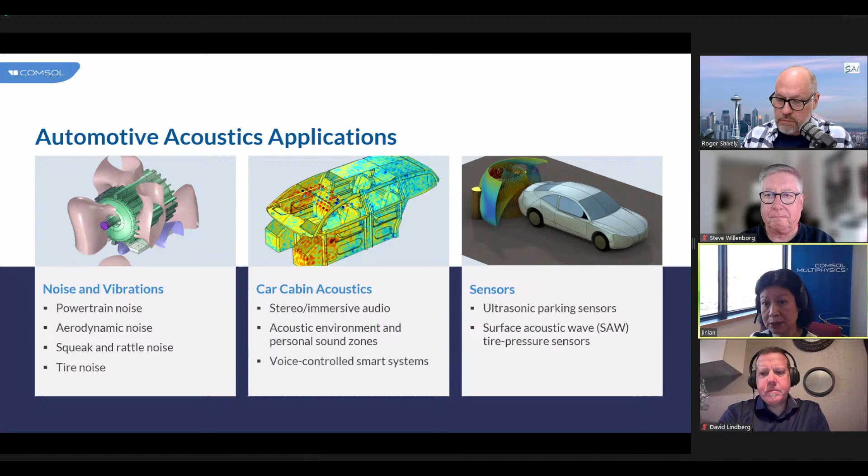So there are all different kinds of applications, and most of them involve multiphysics. Many require acoustic-structure interaction for vibroacoustics, such as the study of structure-borne noise or vibration-induced noise. In some cases, you also need to include electromagnetics, for example, when you want to study noise from an electric motor. Porous materials are widely used in the industry for noise control, particularly in mufflers and particulate filters. Electroacoustics is required for loudspeaker design, and also car cabin acoustics if we want to include the real speaker sources. And piezoelectricity is responsible for the operation of ultrasonic sensors.

And when you talk about porous materials, there's also poroacoustics, where we're talking about these very small spaces in acoustic solutions, which come into play when we're dealing with meshes that go over loudspeakers, or putting a microphone in a position where it may have some boundary. Yeah. Poroacoustics is a very efficient way to model acoustics in porous materials. And I want to say COMSOL provides solutions for all these multiphysics phenomena and offers a range of numerical methods that can be used alone or combined to meet your specific needs.

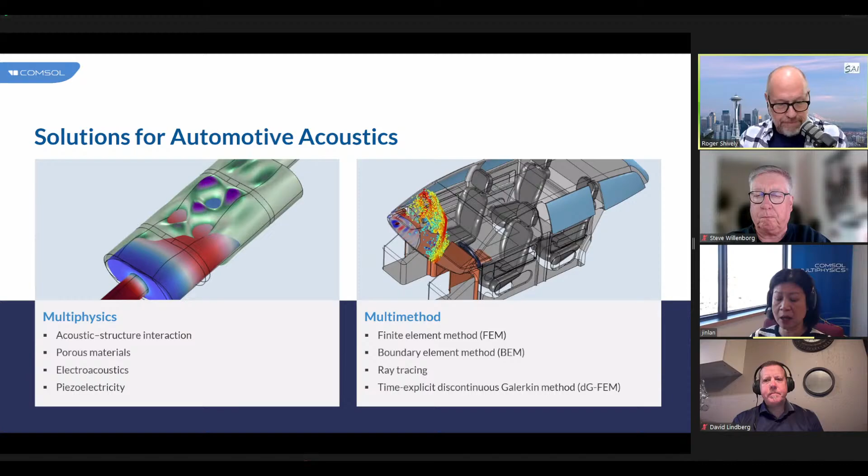Let's take a closer look at the multiphysics and multi-method approach. Quickly, before you get into that, you have those four possible methods. Are they all a single module, or are they separate modules that you put into your base modules for multiphysics? Yeah, so these methods are seamlessly implemented into the Acoustics Module. You do not need an additional product in order to use a specific method. They are all included in the Acoustics Module. Oh, good to know. Thanks. So I want to show you all these wonderful multiphysics and multi-method approaches in COMSOL with a simple vibroacoustic setup.

So as seen from the screenshot, you have a vibroacoustic problem that requires physics interfaces for modeling structural vibrations, here by solid mechanics and shell interfaces. And also you need physics interfaces for modeling acoustics in fluids, here pressure acoustics based on the finite element method and boundary element method.

So Roger, to answer your question, the methods are implemented into a physics interface. So you don't even realize, oh, it's a different method. It's basically you are using a different interface. Okay, good. Yeah, and COMSOL includes built-in features to couple them all, which is defined under the multiphysics nodes. I think that's the power of the COMSOL multiphysics approach. Yeah, there's simply an interaction, not a new process that you have to start over. That's good. Yeah, very good.

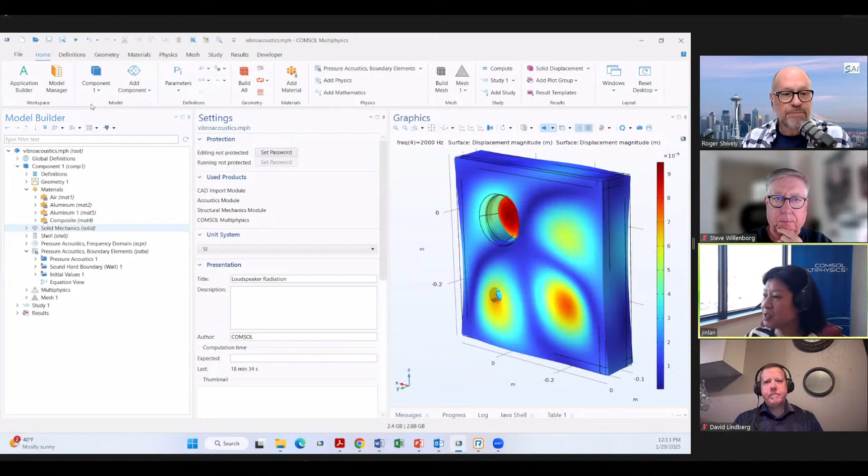Let's open COMSOL and look at the physics interfaces and their couplings, so you have a better view of how it looks. There we go. Yes. So here we basically have a panel with an air cavity inside and a speaker mounted to the panel. So you can imagine this is a very simplified car door model, right? The door is comprised of aluminum solid domains. These domains are modeled with solid mechanics, simply as a linear elastic material in this example.

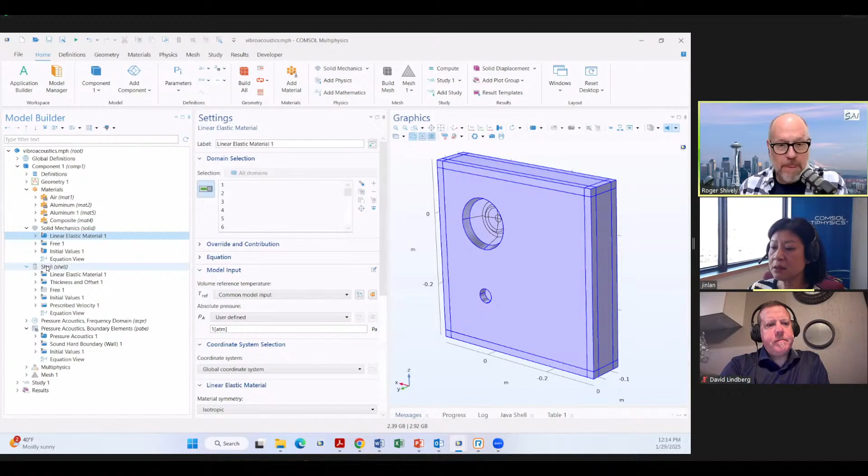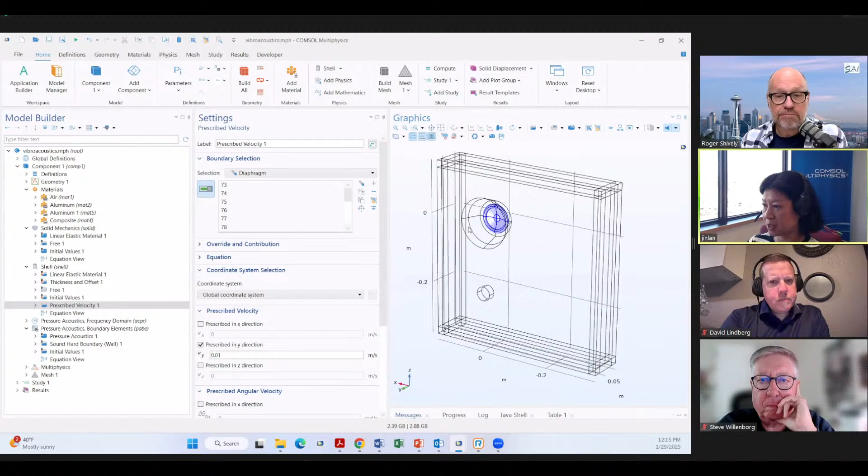And then the speaker is modeled by using shell elements. These are basically very simplified surface elements in a 3D model to model very, very thin structures. Here you are able to specify the thickness of the thin structure, so you can have different thicknesses in different components. Here we simply use one thickness. And in the shell model, we simply apply a prescribed velocity in the y direction. This is the acoustic axis direction to excite the speaker.

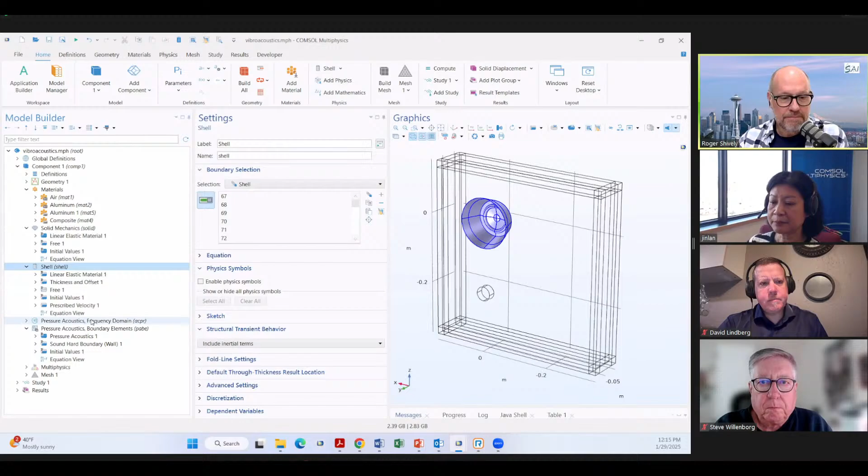Yeah, so you can scale a large model into something that's a little bit more manageable, especially for very, very thin panels. Then you can usually save computational resources, and just model using surface elements, so you do not have to mesh the thickness. You got it. Yeah.

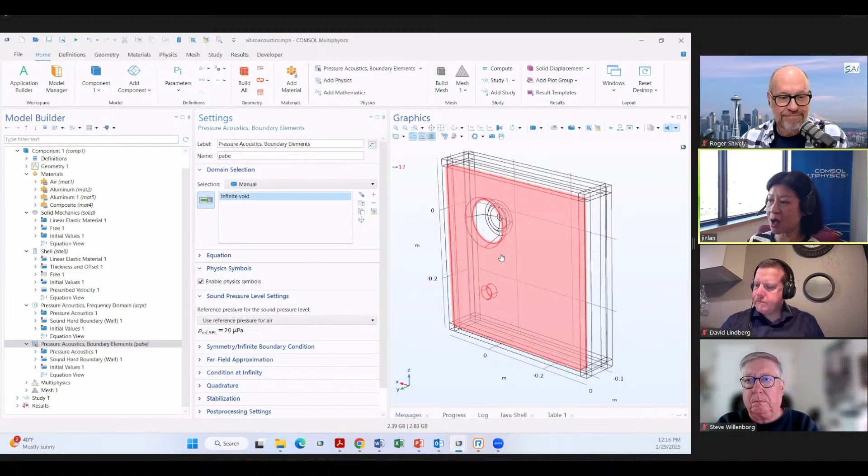And then we have acoustics. We use pressure acoustics, frequency domain. This is pressure acoustics implemented using the finite element method, applied to the air domain inside the cavity. And then we have boundary element pressure acoustics applied to the exterior domain, which is identified as infinite void here. That means anything that is not drawn in the geometry. The exterior domain is modeled using the boundary element method.

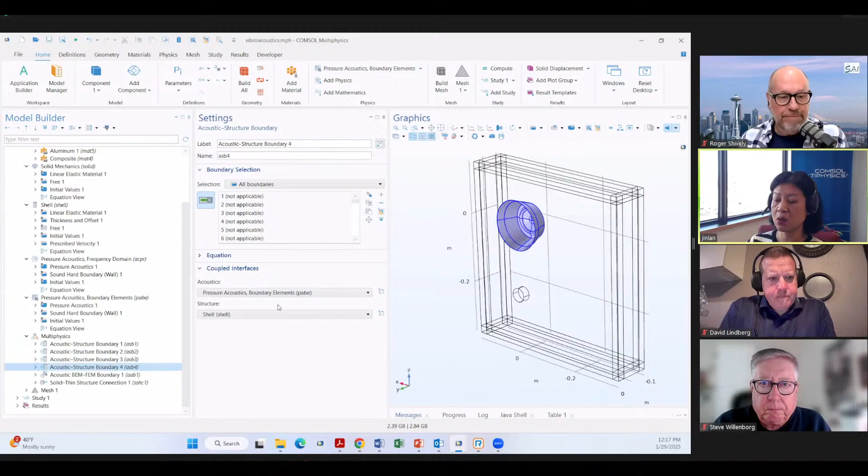Now, all four physics are coupled under multiphysics. We have the acoustic-structure coupling that couples pressure acoustics inside the cavity with solid mechanics. Then the acoustics inside the cavity coupled with the shell vibration. Then the acoustics outside, modeled by the boundary element method, coupled with solid mechanics, and also coupled with the shell. So acoustics are coupled to all the vibrations, and the acoustics inside are coupled to the acoustics outside at this port opening boundary. So acoustics are continuous. Right.

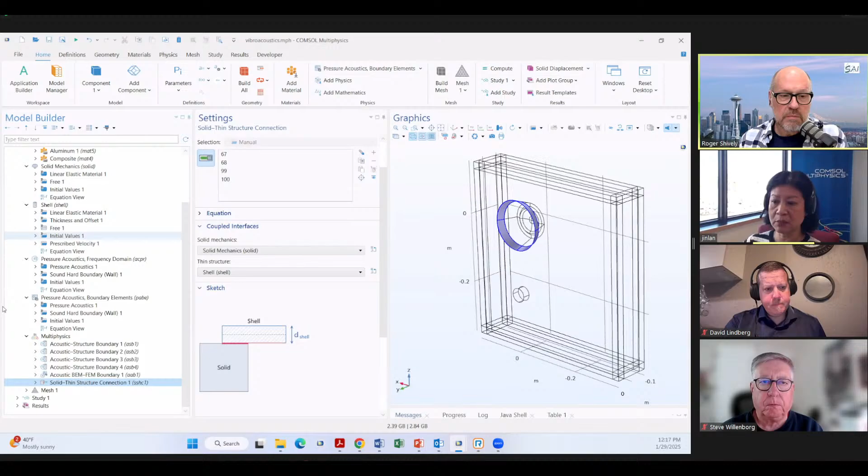And then lastly, the solid and shell physics are coupled at the edge where they overlap. This guarantees the displacement fields are coupled and continuous. So everything is coupled under this, in a very structured, organized way. If you right click, you can see these couplings are built in. You can just add them based on how you want the coupling to be done.

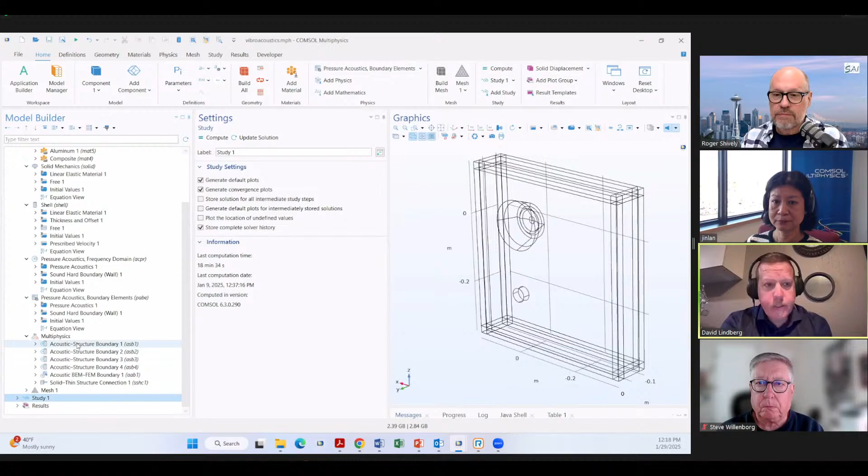Yeah. So you could dig further with this and start adding the adhesives, how you're assembling this, what goes in between those different shell and pressure acoustics components. You just keep adding to it and building what you're planning to build in real life. Yeah. So your geometry can be much more complicated. As Dave mentioned, you can have an adhesive layer. It can go as complicated as it can be.

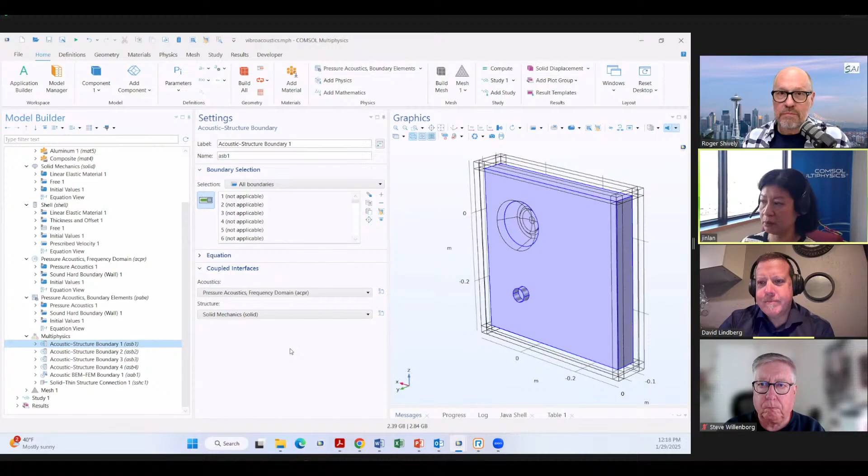And you might have porous material in this structure as well. Then you can add a poroelastic waves interface if you want a very detailed, precise model for the porous material. Then you can couple everything together. It's all done underneath here. Yeah, and these are all built in.

Yeah, I think that's exactly where you end up going, Dave, for sure. We start kind of simple, so we make sure that the general physics makes sense in a grand sense. And then as we see how that's doing, maybe we start to focus on particular areas. You may not need adhesive everywhere, but just where you might find it important.

And that makes you a more refined model, but it's something you can work yourself to—step one, do something very conceptual, and step two, do something more refined so we can get the detailed information needed to make it more of a real product. It's not just an analytical design.

It gives you those design freedoms, so you can look at whatever aspect is important to you. And the beautiful part is the coupling that goes on here—we'll get into that later when we get to the time domain. But yeah, that's even better. Go right ahead. Thanks, Jinlan.

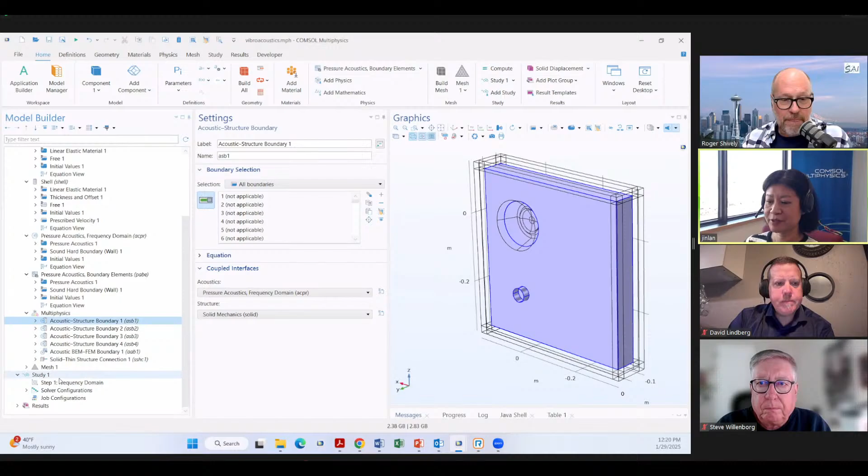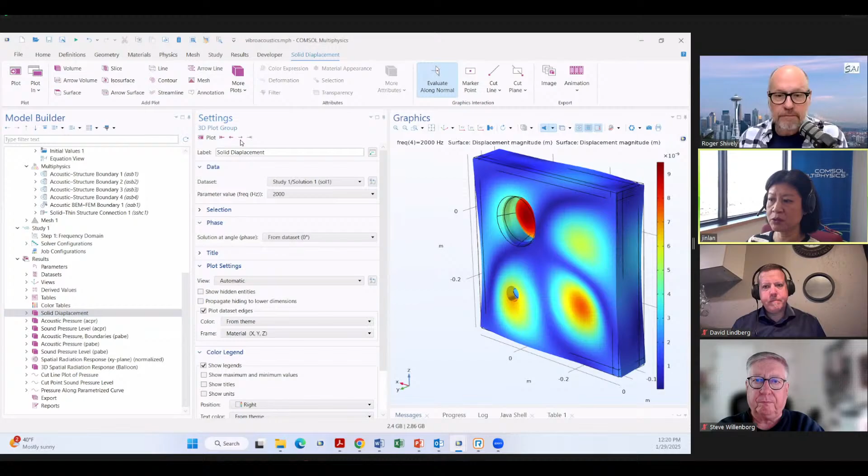Sure, thank you. So now we run—of course you create a mesh first, and then we run the study. Here I just run several frequencies. Then you get these nice default plots showing the displacement for different frequencies. You're able to see higher and higher modes start showing up as frequency increases.

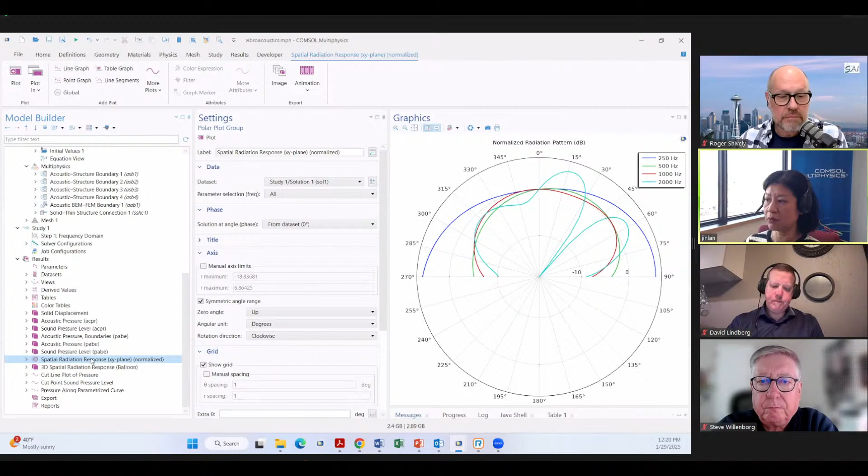Then you're able to see the pressure inside the cavity, sound pressure level, then pressure outside—this is done by evaluating the BEM solution and sound pressure level as well. COMSOL also creates default plots showing the radiation pattern, so here is a 2D polar plot showing the radiation pattern for different frequencies, and you can also get a nice 3D balloon data plot.

So yeah, I always want to start with simple to give you an idea, then we're going to dive into more complex models. So let me go back to my presentation.

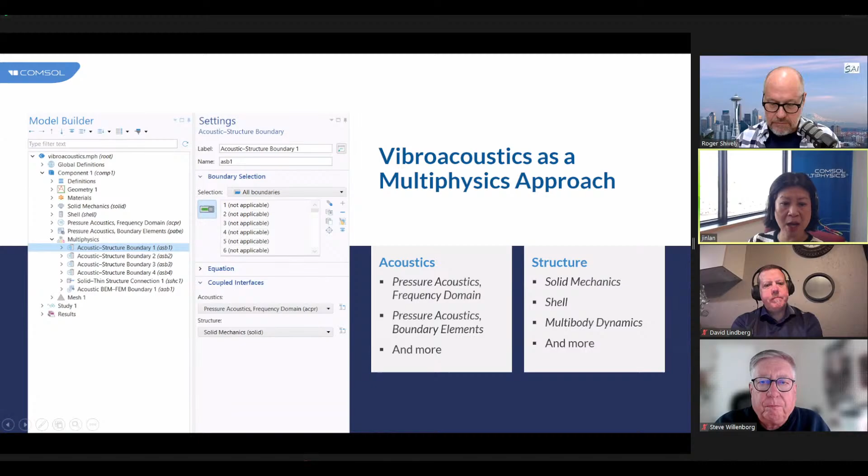Yeah, the example I showed is relatively simple, right? But the principles described are crucial in vibroacoustic applications. So let's dive into more examples in this regard.

So this is a model for an electric motor. It predicts the noise generated by an electric motor during its operation. This motor uses permanent magnets in the rotor and coils in the stator. The coils carry a variable frequency current to generate torque, which results in vibrations not only at the frequency of excitation, but also at higher frequencies, or harmonics.

So the complete study includes a few steps. First, a transient analysis determines the electromagnetic force in the time domain. Then a fast Fourier transform is conducted to determine the contributions of each of the harmonics. And finally, the vibration of the motor casing and its acoustic radiation is computed in the frequency domain.

Now you see the left animation shows the displacement and acoustic pressure at a specific frequency, and in the right image you can see the sound pressure level at half a meter away from the motor. It's not difficult to notice that the radiation pattern has many lobes, meaning the acoustic response depends greatly on the location of the listening point.

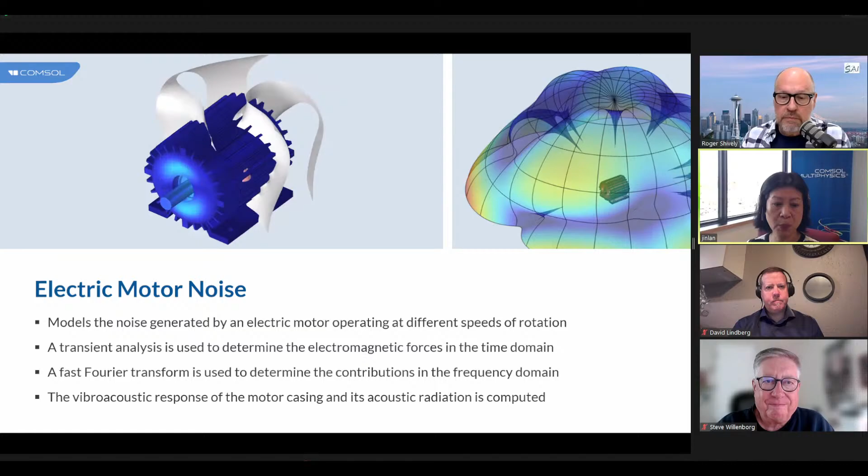Here is a more complex model studying the radiation of sound from a gearbox. The vibrations originate from the gears due to varying gear mesh stiffness, and they are transferred to the housing, resulting in acoustic radiation.

The analysis also includes multiple steps. First, you run a vibration analysis to study the vibration of the gearbox—it uses a multi-body dynamics analysis, done as a transient analysis. Then the normal acceleration of the housing is converted again to the frequency domain and used as the noise source for acoustic analysis.

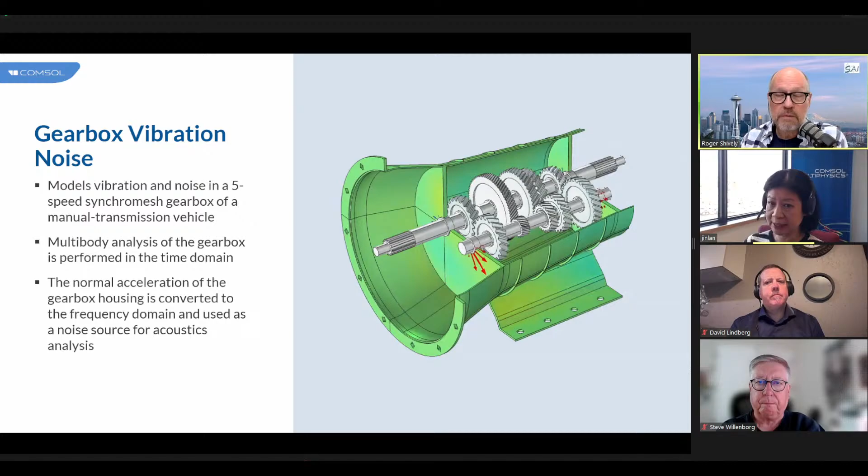Note this model, as well as the previous electric motor example, is based on a one-way coupling, which means you neglect the feedback from acoustic to the structure. This assumption is reasonable if the surrounding fluid is a light fluid, like air—you neglect the acoustic load on the structural vibration. But when we go underwater it's different; for heavy fluids like water or oil, the unidirectional approach is no longer valid.

This is confirmed in this fuel tank vibration tutorial. Here, the tank is partially filled with fluid and subjected to a vertical acceleration. This study compares two methods for representing the fluid. One uses a traditional approach of adding the fluid mass to the tank's wetted surface, so the fluid is not simulated specifically. The other is a full multiphysics approach where acoustic pressure in the fluid is modeled and fully coupled to the structural vibrations. The results from the two methods show significant differences, as seen in the plot on the right.

Here, the data represent the transfer function from the applied excitation to the Z component of the stress at the mounting strap. You can see the difference highlights the importance of accurate vibroacoustic modeling for predicting stress or fatigue in fluid-filled cavities. The left animation shows the von Mises stress with deformation and acoustic pressure for the multiphysics analysis.

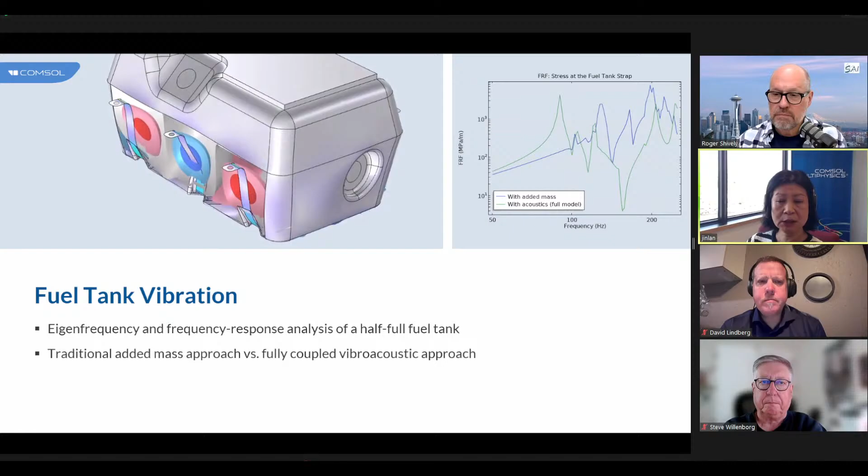We also have many examples of mufflers and particulate filters. So here shows some of them. These are all online at the COMSOL webpage, so you have some examples. If you are doing particulate filters, or you want to study mufflers to minimize the noise, you are welcome to go to our website and take a look.

I want to especially bring your attention to this particulate filter example on the top right. This is a new example showing that you are able to use a lumped method to reduce computational complexity. In this particulate filter system, the filter itself contains over a few thousand channels. This is basically the filter, like what is amplified here. You have porous layer structure with long air cavities. So the filter contains thousands of cavities. If you want to include all these cavities in the complete model, it's going to be very expensive.

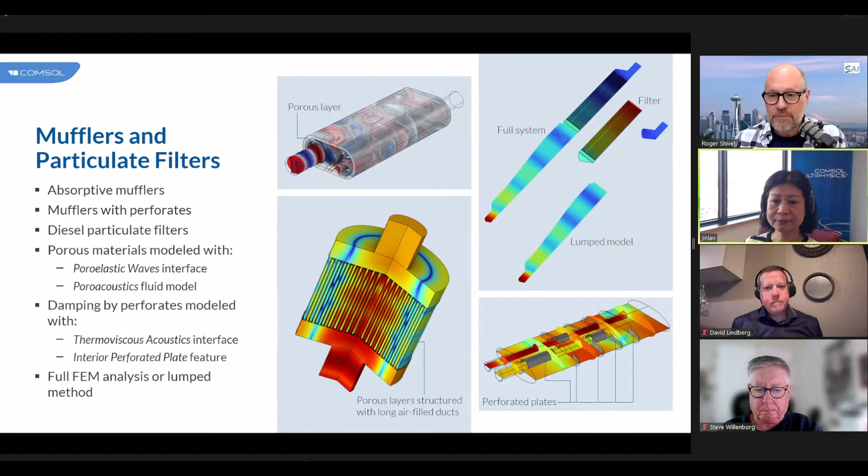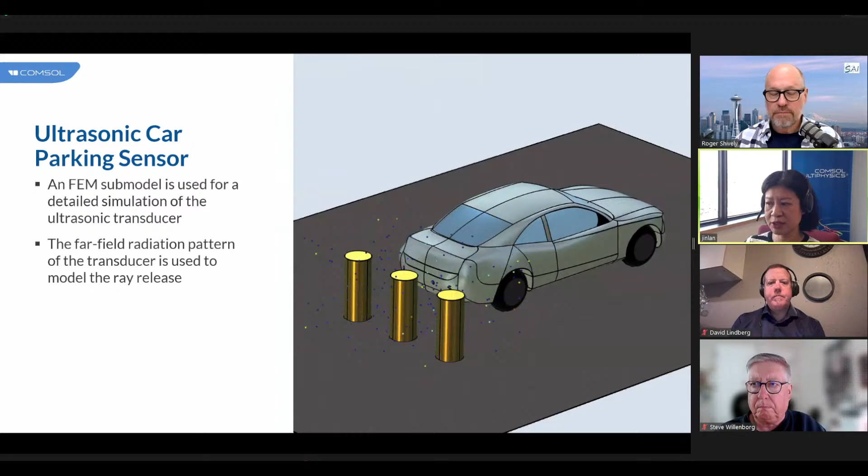So we also have an ultrasonic car parking sensor example. This is very nice. You use a real sensor transducer here made of piezoelectric materials. You can solve the transducer first, use a FEM model to get the radiation pattern, and then that radiation pattern is used in ray acoustics to model a given parking scenario. It's a very nice example combining different methods in one study.

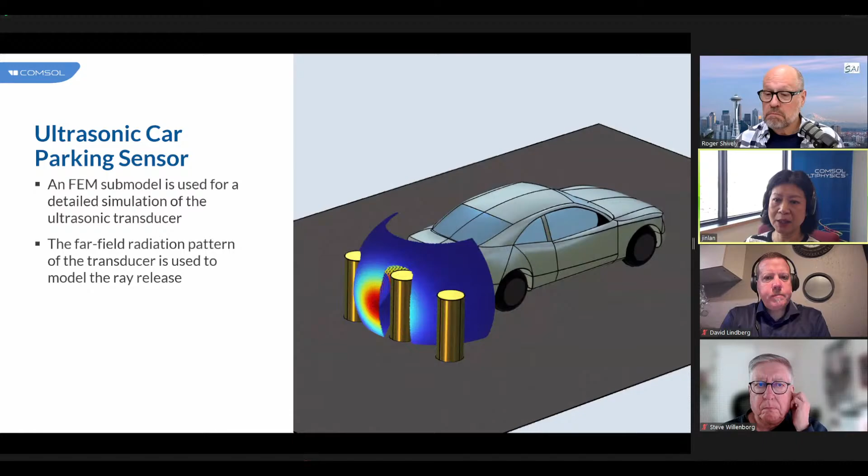Now I want to look into car cabin acoustics. This is a hot topic, a lot of people are interested. COMSOL supports all different types of analysis, and you can combine different methods to obtain broadband acoustic behavior in response to real speaker sources.

There are several examples using the same cabin geometry. The sound is either emitted from a tweeter in the dashboard or a mid-woofer in the front door. In these examples, the speakers are represented by Thiele-Small parameters and coupled to the acoustic domain using the lumped speaker boundary condition.

To Dave's earlier question, if you want to get more refined, you can put a model result of a full speaker in the door module, and then take the output of that and couple it to your larger cabin model instead of just using a Thiele-Small source, which treats it like a plane. You can also take in the structural and three-dimensional vibrational behavior of the loudspeaker too, if you want to get more refined.

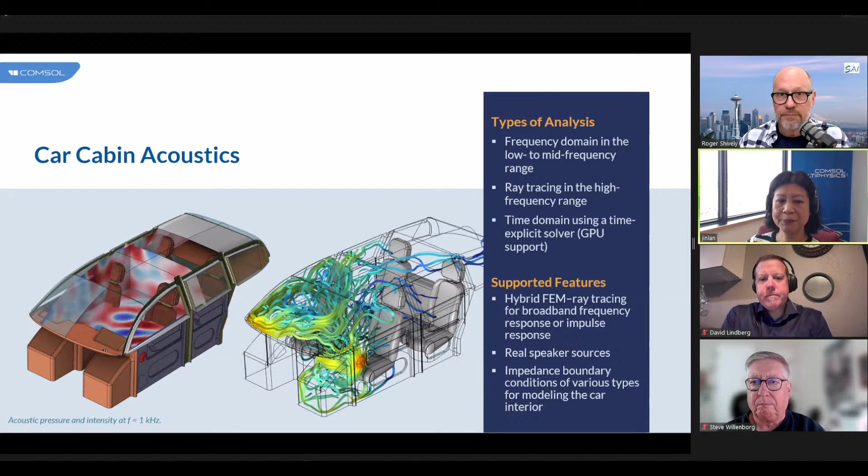Exactly. So we have a lot of examples, I'm not going to go into detail. I think many of you are already aware of this frequency domain analysis model for low frequencies, because you need to use a full wave-based method for lower frequency in order to capture the modal behavior, right? So this model actually solves up to 4 kilohertz thanks to an auto-generated iterative solver option.

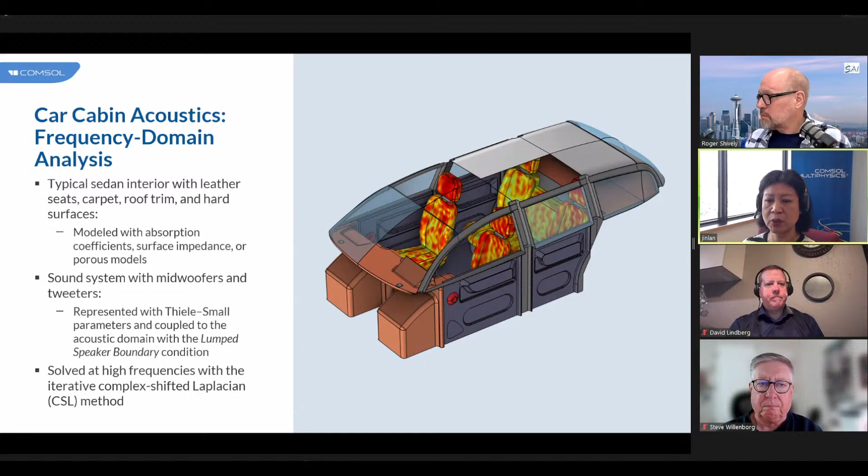I'm going to show you quickly in COMSOL. I want to bring your attention to a new model for frequency domain analysis. This actually solves up to 10 kilohertz by using cubic discretization.

This is a new model that combines, maybe, a better combination of mesh element order with a solver. We have this higher discretization order which allows for the use of a coarser mesh and an optimized iterative solver approach. So for 10 kilohertz, the problem has around 72 million degrees of freedom, and it only requires about 235 gigabytes of RAM, which is very doable and manageable nowadays.

And this model shows how to set up the solver, so the essence here is that you've got a higher order, like the cubic element. The element itself has higher discretization, so that your entire mesh can be a little bit coarser, and that improves the efficiency.

Exactly. So before, typically we use a second order, but this time, cubic order seems to be more efficient for this, for large models.

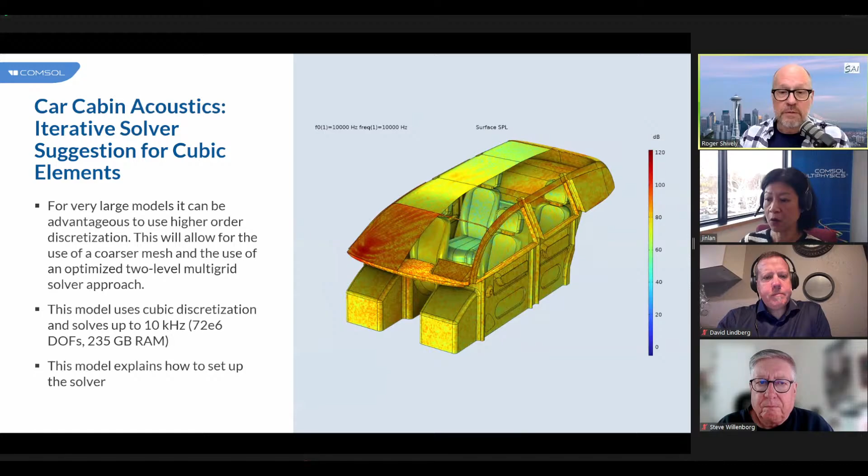All right, and you have that example model online as well? Online as well, yes. Good. Yeah, we do.

And then I'm going to skip that because I'm going to show you in the GUI. And then we have this hybrid model, which is a ray acoustic model.

Now you solve a FEM model of the speaker. Right, this is a tweeter located in the dashboard. And then you solve a smaller FEM model to get a realistic source because it includes the near field effects, right, from the reflections from the nearby geometry.

Then the solution is used as a ray source for ray acoustics. This is for higher frequencies when a full wave-based method is not practical anymore. Maybe ask the question, then when do you make that decision to go to ray acoustics? If you're saying the cubic model has maybe up to 10 kilohertz, the ray acoustics is going to take you into the higher frequency range, beyond 10K to 16, 18 kilohertz?

Yeah, although I just showed you can run a FEM full wave up to 10 kilohertz, you might not need to go that high. Usually that is determined by the Schroeder frequency, right? You estimate it based on the absorption of your surfaces and the volume. So that is something you can calculate, but usually you want to go higher than the Schroeder frequency.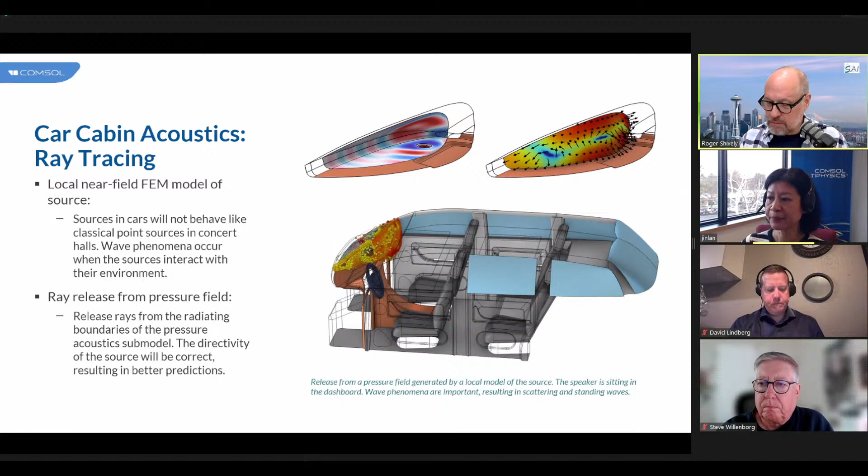All right, so now you are able to combine the low frequency full wave solution with the ray tracing solution to get the broadband result.

You can get this post-processed inside COMSOL? Yeah, I'm going to show you. So now you base it up, you get the frequency domain analysis for full wave solution for lower frequency, and then ray acoustics for higher frequency.

Then you apply high and low filters to combine the solution. And you're doing that by concatenating, putting together the impulse responses. Exactly, so you're doing that, okay. Yeah, we can do this inside COMSOL.

And this is explained in a blog and an example for room acoustics, but we also created a version for car cabin acoustics. Now I want to show that. Please, yeah.

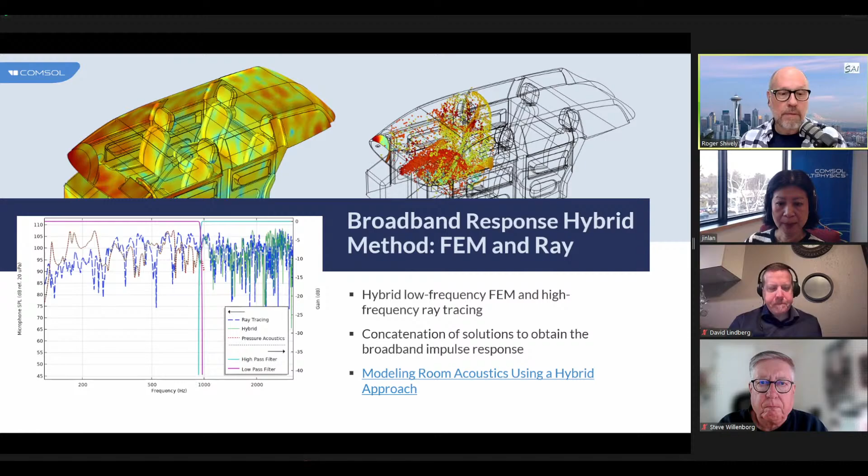So Roger, let me know if I still have time. Oh yeah, please. Yeah, I think we're good.

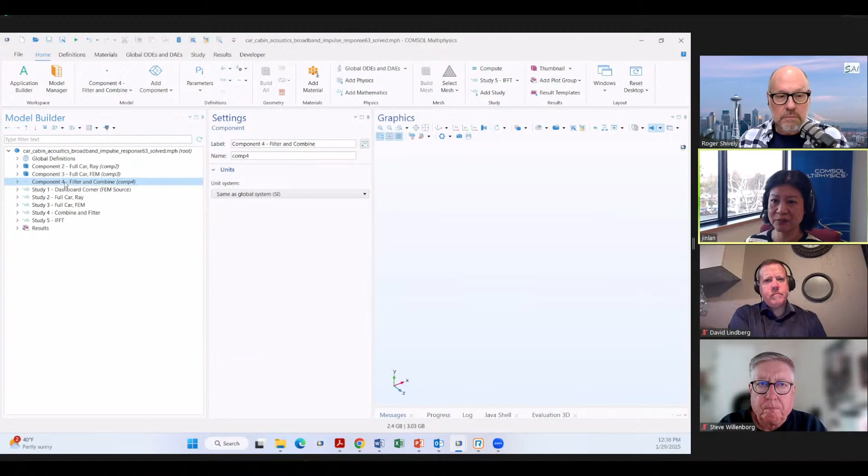So here you see I have several components. You can include as many components as you want in the same model, and each component can solve for a different geometry, for a different study. Now I have everything here. This is like a full-wave car using FEM for lower frequencies.

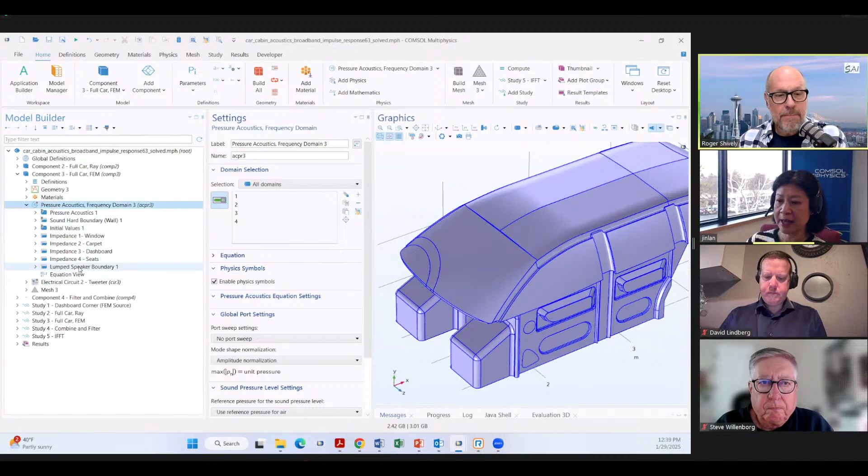So what I have is frequency acoustics, pressure acoustics in frequency domain. This is a FEM-based model. Now here I have this lumped speaker boundary. This is a tweeter here, applied to the diaphragm. This is coupled to the electric circuit, which represents the tweeter. It's modeled by Thiele-Small parameters. This is a standard SPICE netlist.

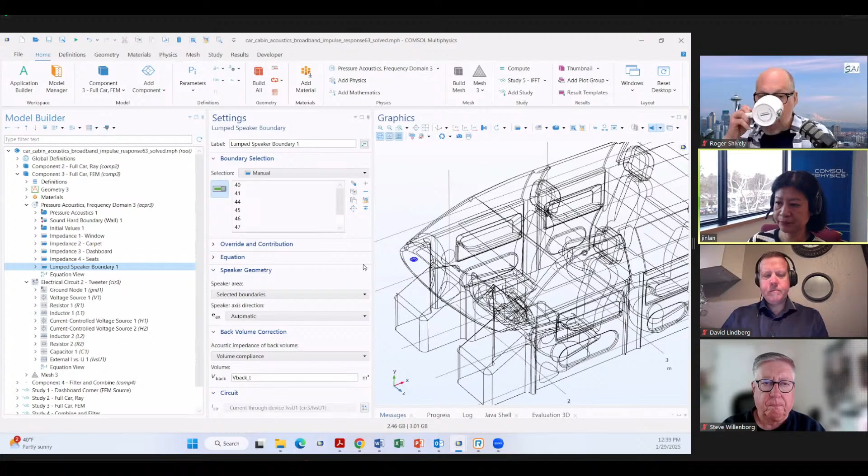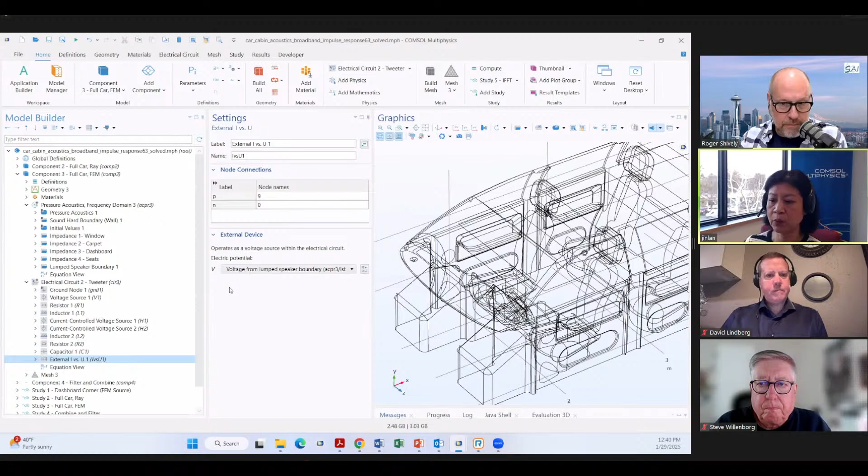So the speaker circuit is coupled to the pressure acoustic domain using this lumped speaker boundary. The current, which is the velocity, is coupled back to the acoustic domain, and then the acoustic load on the speaker is coupled back to the circuit. The load will be represented as a voltage. So these two are fully coupled, two-way coupled, so they will interact with each other.

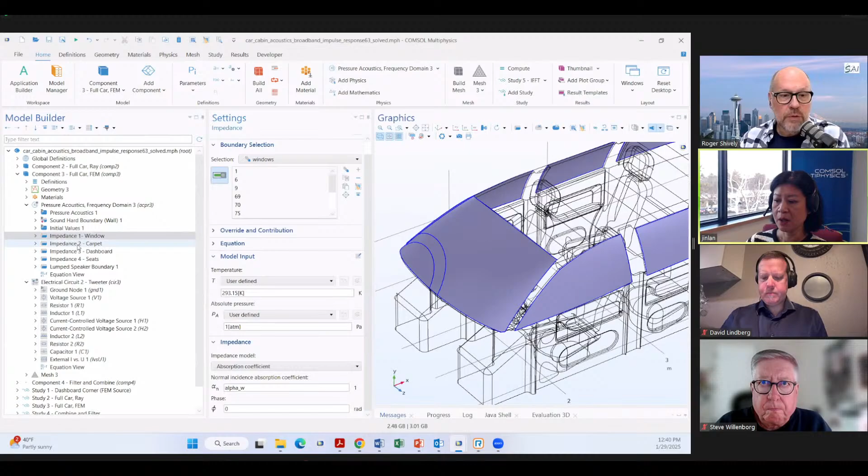And then you can have all different boundary conditions here, absorbing boundaries. You can prescribe absorption coefficient or impedance, or you can define a porous layer. We have different built-in options you can use. Keep in mind, this absorption coefficient can also be frequency dependent, so you can bring in measured data to take into account the frequency dependency.

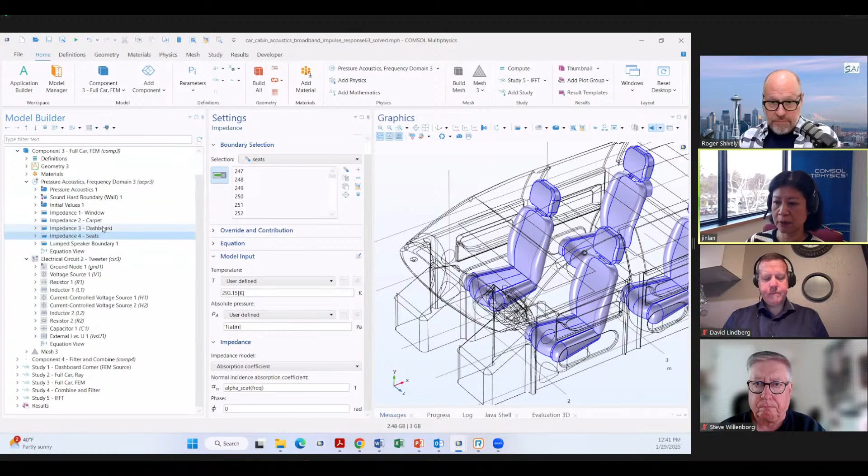And also the seats - we have all these absorbent materials included, and then of course we mesh the entire car. Then we solve the model using a frequency domain analysis. Here, this study - you can have many studies - and this study only solves for the full-wave components.

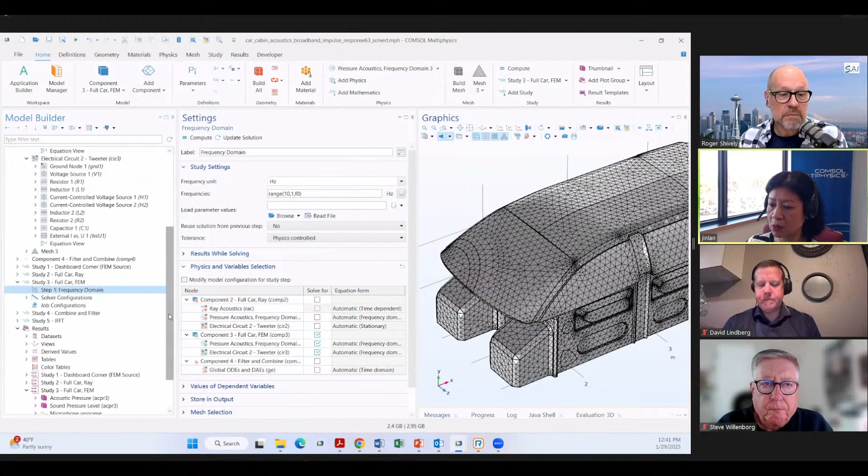You can see that, and then you are able to get results for low frequency. You can get different kinds - here we solve up to 1,000 hertz. And then you see there's a sphere here - this represents the location of a microphone. Then we are able to get the microphone response. So here we plotted the real part of the pressure detected by the microphone and the imaginary part. This is the solution from the FEM model, the full-wave model, up to 1,000 hertz.

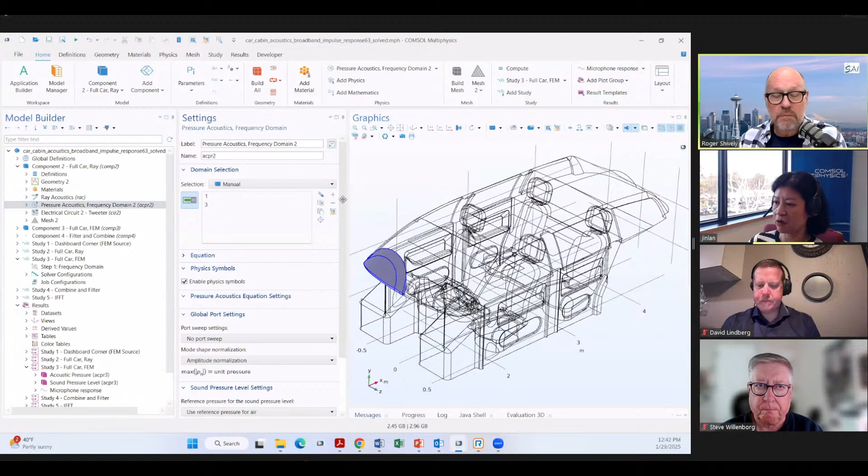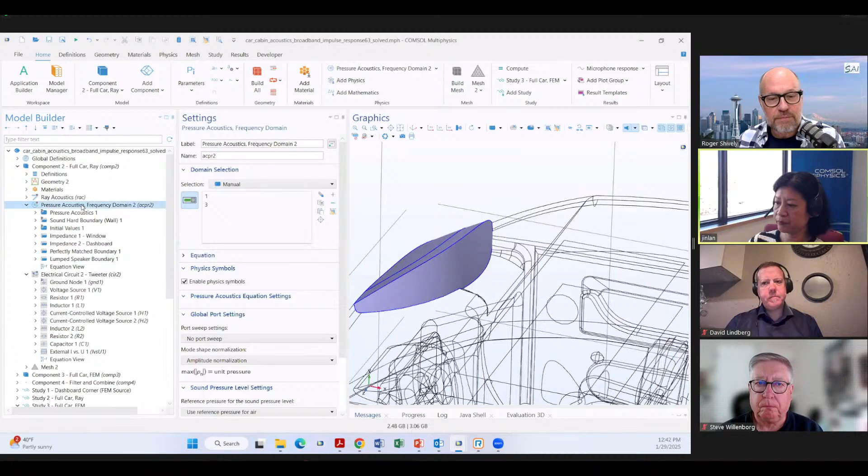Then we have the components we solve for higher frequency. For the higher frequency, we first solve for a FEM model. Again, the tweeter is simulated using the electric circuit, and then we have a lumped speaker boundary here to represent where the speaker is. This is solved - the FEM model is solved in study 1. Here we solve for component 2, and we can get the solution for just this smaller domain.

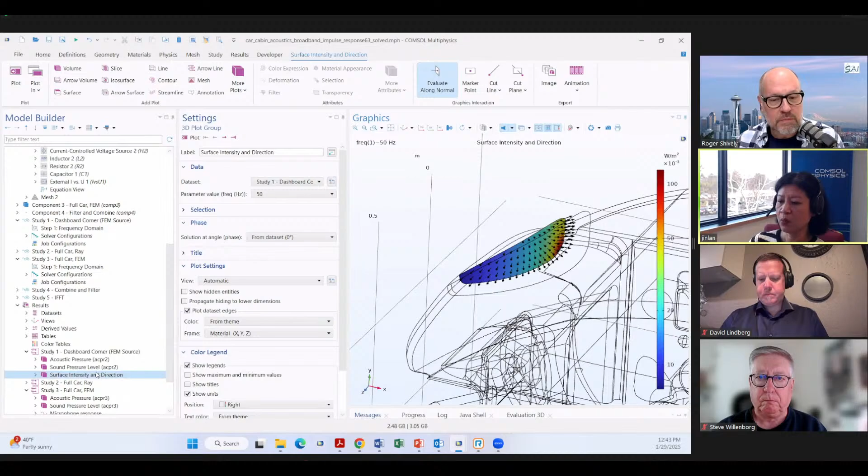And I want to show you - this shows the boundary, showing the surface intensity, magnitude, and direction. This will be used directly - it's a very nice feature. You can use this directly in ray acoustics. So you can see we have the release from pressure field - we'll use the solution directly from this pressure acoustics and release rays from this surface for ray tracing.

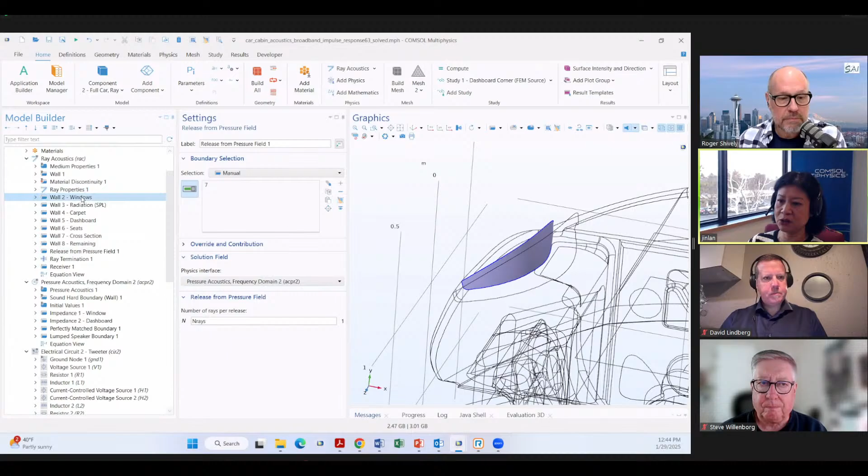Basically feeding the full car cabin with this information from a submodel. So you just don't have to manually type in equations, but just call this solution from this physics. And then very similarly, in the ray acoustic model, you prescribe these absorption conditions - the setup is exactly like the FEM model.

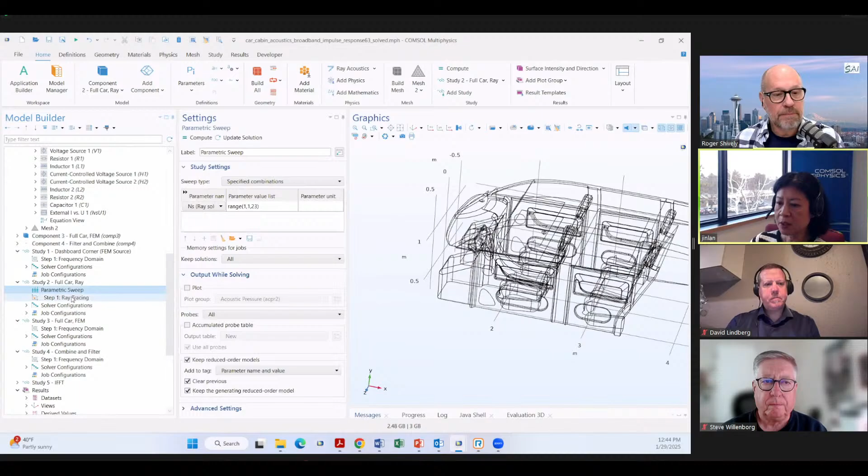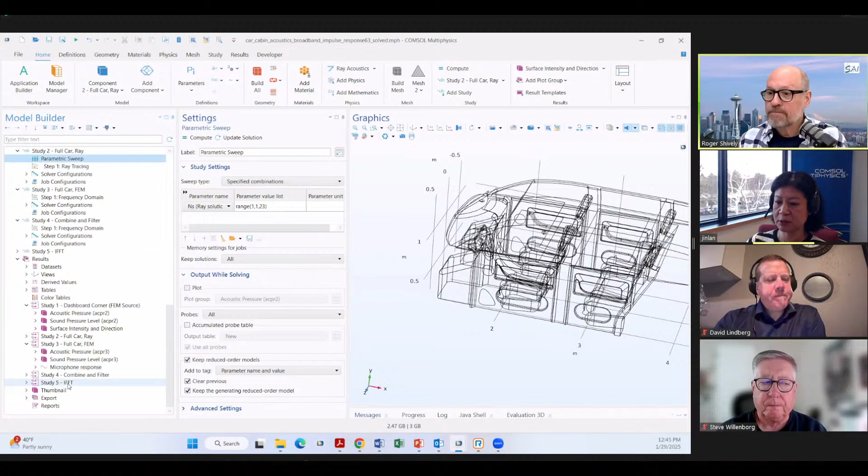And then you are able to run - let's go to the full car. No, here study 2 - here we solve ray tracing, we see only the ray acoustic here now. And then we run a parametric sweep to solve for all the frequencies. Here NS just indicates a solution index from the dashboard corner of this study. So we are able to solve the ray tracing model, and then you will be able to see the ray trajectory for each frequency.

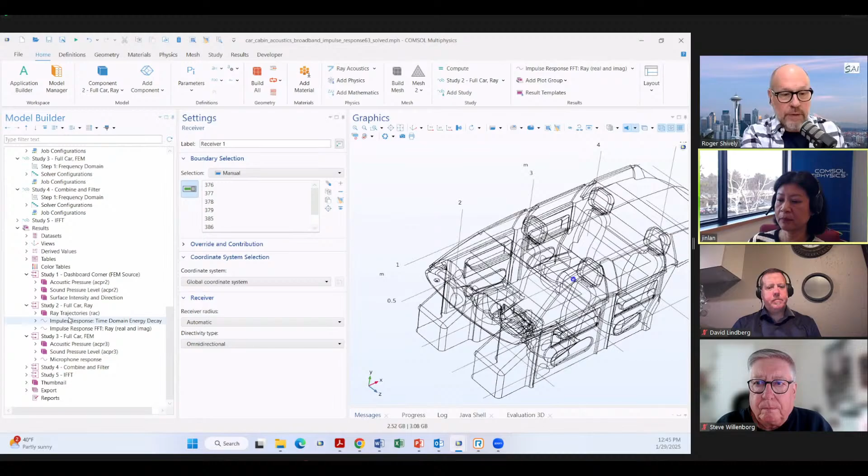And then you can combine these results like you showed previously. Now we have the impulse response, and we can do an FFT. So from the receivers - again we have a receiver, I forgot to mention - we have a receiver, the same thing there. Then the signal received by the receiver will be exported again, the real part and the imaginary part. So we have two data sets. Now, in component 4, we combine them.

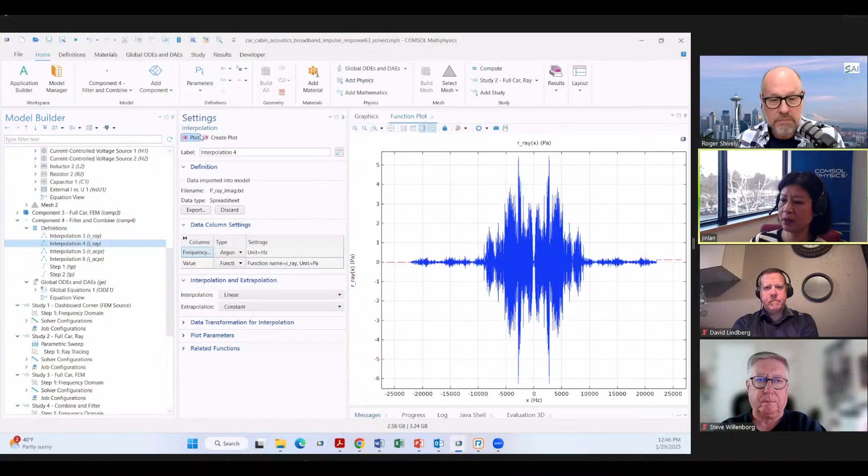So here we basically have the real part from Ray, the imaginary part from Ray, and also the real and imaginary parts from the FEM model. And then we have a high pass filter and a low pass filter, and this is combined using the global equation.

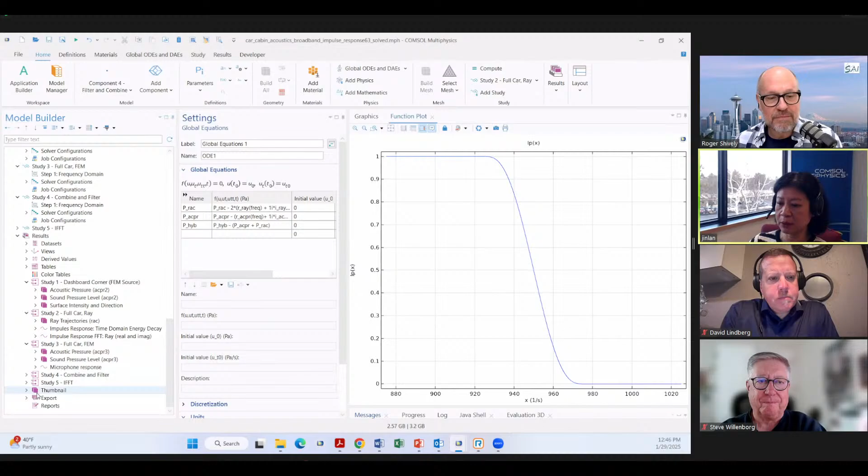I'm not going to go through this, it's fine, this is a template. Then you will be able to see after we run the model, we're able to combine, and we are able to get here.

This is new with 6.3, I'm guessing, is that right, or has it been there before? This model is new. We have a version for room acoustics, but now we have a version for combined.

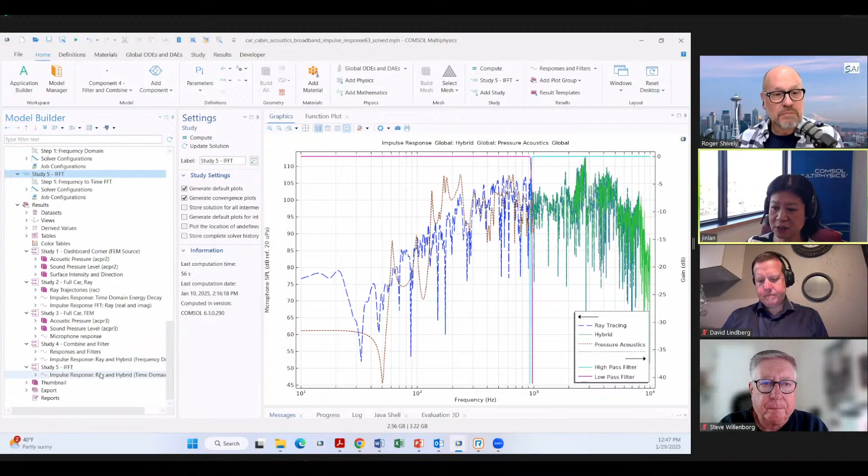And then finally you can do IFFT, using this dedicated frequency to time FFT. This will give you a broadband impulse response.

Excellent, this is great, so we are coming close. So before we finish, maybe you can talk a little bit more about the time domain solution and how GPU can benefit as well.

Yes, that's actually next. So this is a transient analysis, the same car geometry, and it computes the transient response to a Gaussian modulated harmonic signal. The model is solved with the pressure acoustic time explicit physics interface.

It has very nice features that allow you to incorporate frequency dependent damping on boundaries. So real damping models can be used in the transient analysis, and the model is solved using an accelerated solver formulation that can be run on GPU.

As Roger has mentioned many times, I know he's excited about this feature. So GPU support is new in 6.3.

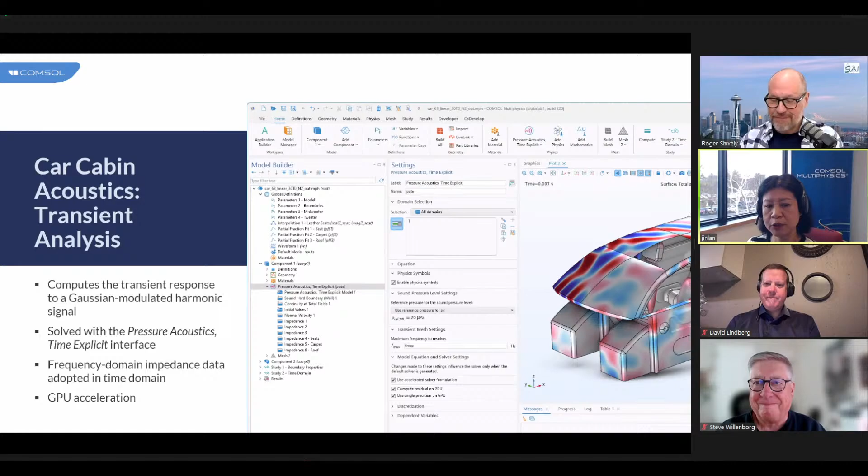Yes, it is. So to give you an idea of the speed up, here shows the performance. The model solved for 49 million degrees of freedom, that is like 30 acoustic cycles for a 1,000 hertz signal.

Now on a modern GPU, this is done in 1.5 hours, compared to 19 hours when the same model is solved without GPU. So this is about a 13 times speed up.

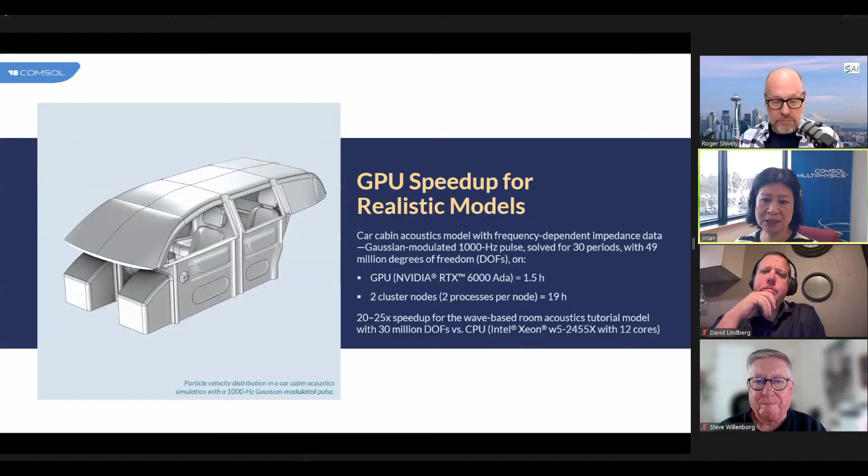We see an even bigger speed up for another case when GPU is tested for our wave-based room acoustic model. That's great.

And I see that it was exclusive to NVIDIA cards, so is that still the case? And then eventually it'll be ported over to, well, at the moment we have NVIDIA.

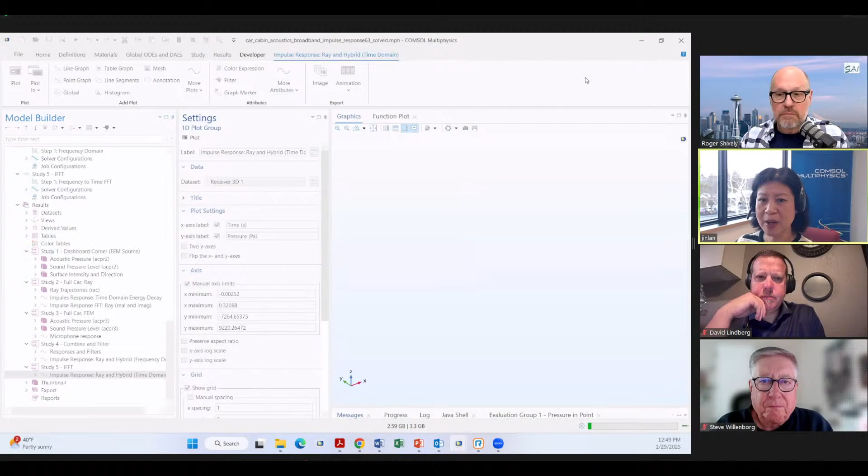We are exploring more, actually, let me show you the setup. I don't have the model with solution because it's very big, so I have the model without solution, but I just want to show you.

Okay, this is a pressure acoustic time explicit, and then here you have, this is new. So here we can check this use accelerated solver formulation, and you can choose compute, use GPU.

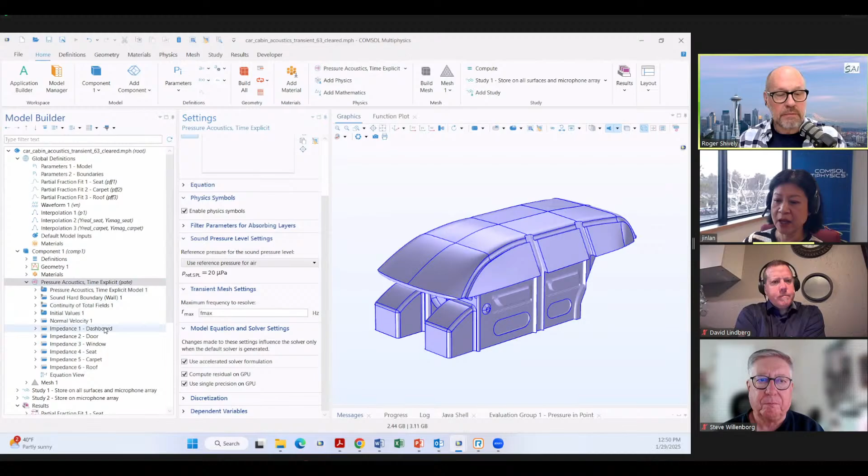Even without GPU, if you uncheck that, you will get a speed up because we have CPU acceleration. So that's under the time explicit, pressure acoustics specific physics interface, and very nicely we actually support all these.

This frequency dependent impedance condition, here it's done by a partial fraction fit function. So what you bring in is frequency dependent admittance data, and then you can fit it into partial fractions using this dedicated partial fraction fit function.

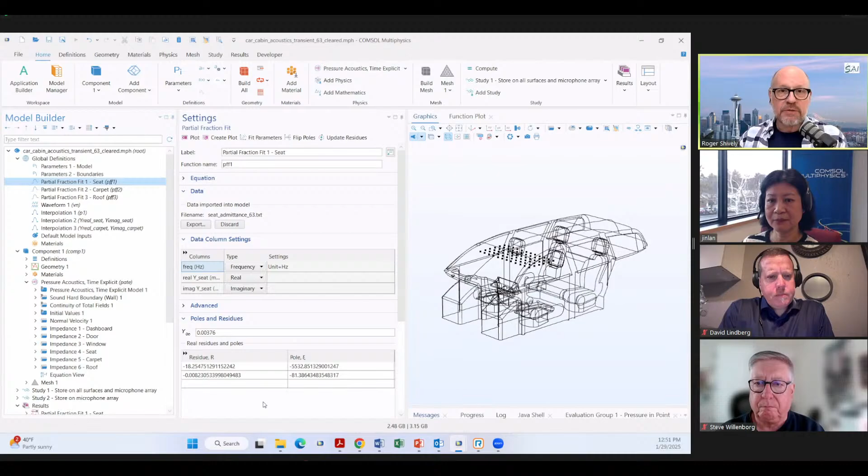Because that's basically saying that your absorption isn't linear. The car cabin is not going to be a linear space, and so that's what you first realize when you do the first model, and then you have to go out and find out where the nonlinearities are in your assumptions.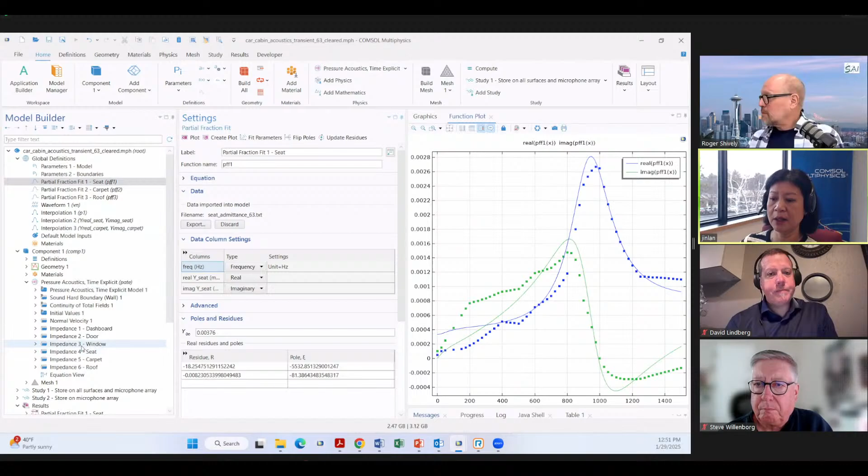Exactly. So you can bring in measured data, or you can get the frequency dependent absorption from a submodel, then you can fit into this, and then apply it to the transient model.

I will actually have a webinar done by COMSOL next month. I'm going to talk about details about using frequency dependent data in time domain analysis. If you are interested, you can come and learn more.

It sounds like there's going to be a lot of things coming up, and I think we'll probably have you back as well, so we can get into more details.

We have a couple of questions that maybe we could quickly go to. There was something about a question about what should the settings of the impulse response be for the FFT. I'm not sure if I know the full purpose of the question, but if you're taking the impulse response and then doing an FFT, is there anything specific to the settings?

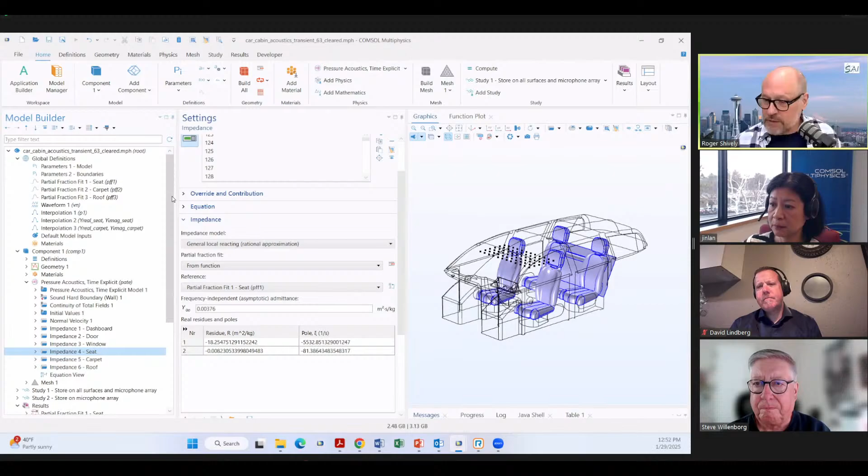Let me see if I still have that model. So yeah, and I think everything you showed us today, you say is online or not online? Yeah, it's online. You mean the study settings for doing IFFT? Yeah, any of the models that you've shared with us today, you can go and find them.

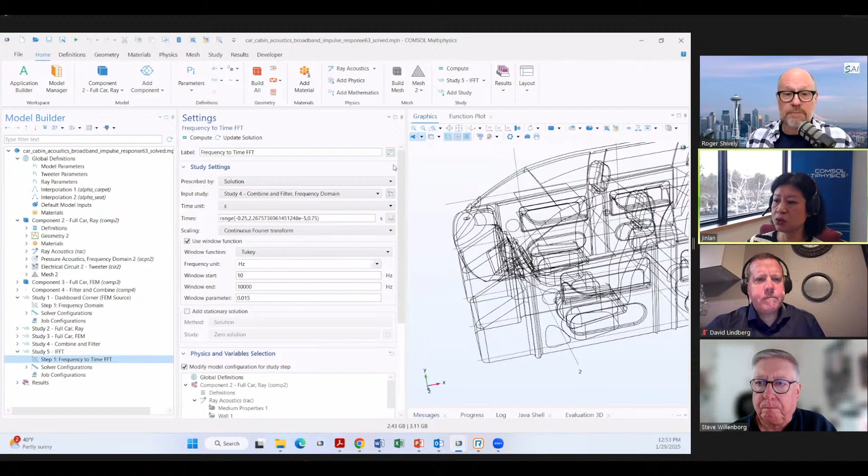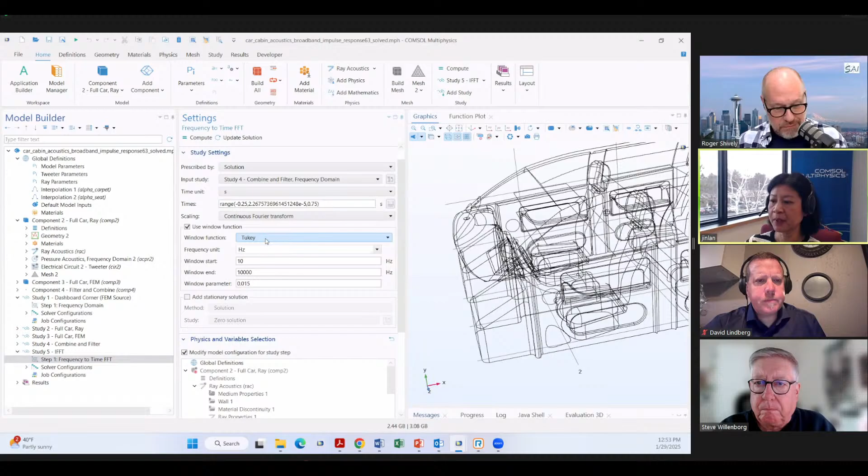So basically this is a solution study. Specifically you can say I want to do IFFT on a solution. So you just have to tell it what solution you want to get, and then you get a range of time, and then you specify. Oh, we also have different window functions you can apply, and then you specify the frequency range. Then COMSOL will do the IFFT for you.

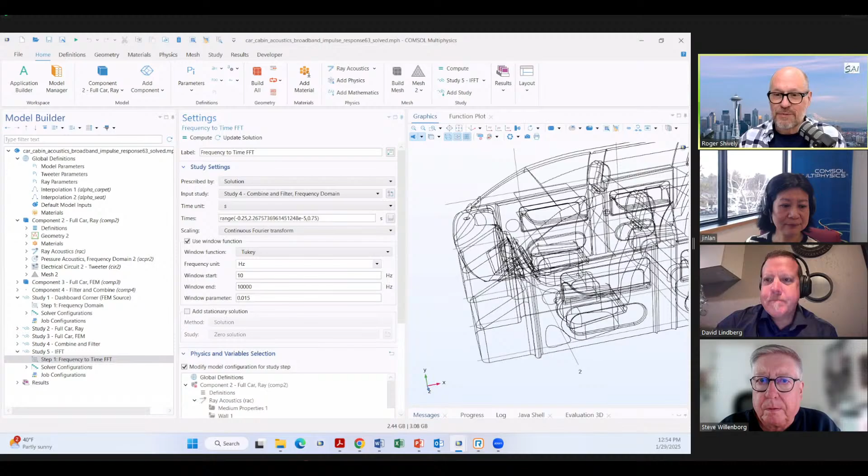I appreciate everything. This was lovely. Thanks, Jinlan, great job, that was fantastic. Lots of good information. And like you say, you've got many things coming up this year, more than normal probably. You're probably every month putting together some webinars on your own, and we will probably crack in and put some things out there again on something specific that maybe isn't automotive, but is just as interesting. So good job by you. Thank you very much.